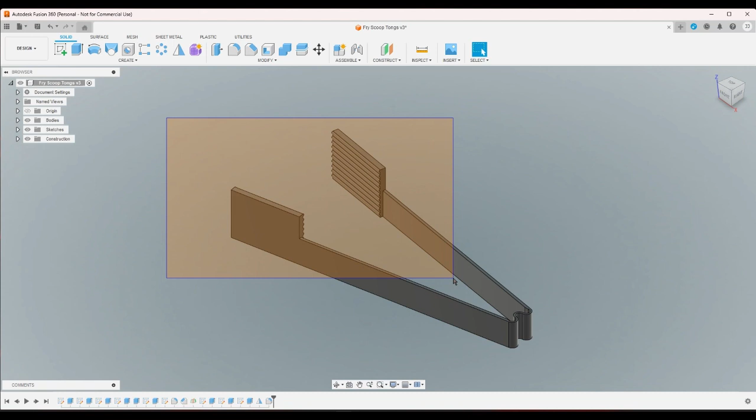I printed out the tongs here. This much was good. This much was not, but the important part was this much, because I wanted to know how well this joint worked. But I did need to know how well these would work, and they didn't work all too well because they aren't stiff enough.

So I'm going to go ahead and go back on certain things so that I can change things.

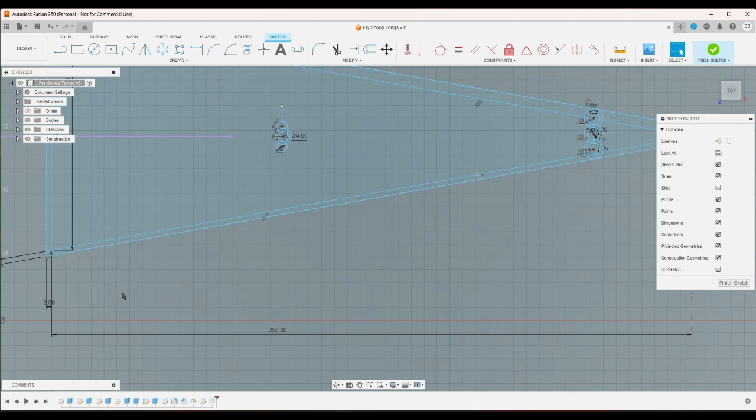What's going on? So to make it stiffer, I was afraid of that. To make it stiffer,

I see, it's because these are the same. I'm going to go ahead and delete this. Oh yeah, delete. Now I should be able to make this 4.

Okay, that still wants to be driven. Now can I... that still wants to be driven. That can be bigger. What's driving this?

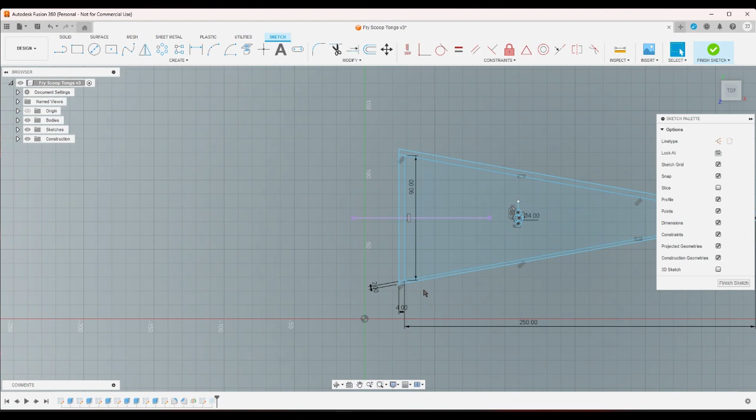Oh. There, okay. So that'll make it stiffer.

And now I'm going to go ahead and... these should be this point right there, and that point right there should be, or that line should be coincident.

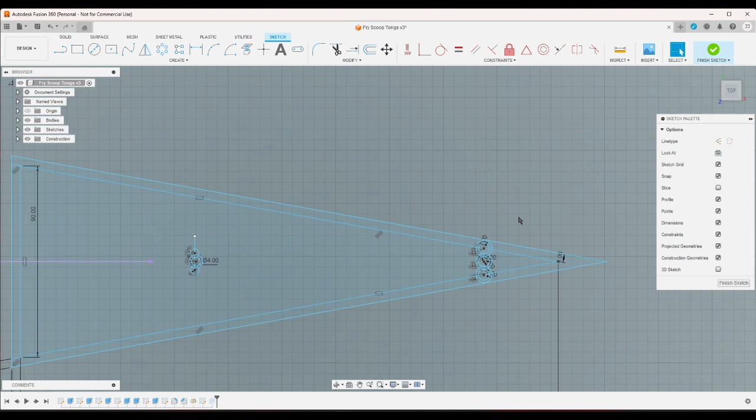And then I want to move this. Yeah, I'm going to change these to actually 1.6. What? Can I not do that? No, it's because numlock keeps getting turned off for some reason.

There, and then I'm going to go ahead and put these back where they're supposed to go. That fully constrained it, so that's good.

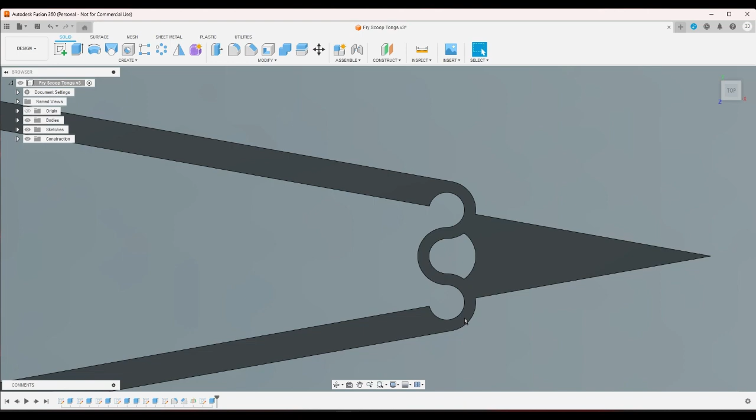There, oh wait. Okay. So that'll make these stiffer, but I won't quite make them stiff enough. At least I don't think it will.

So then what is the angle there? That's 0. That's good, I want it to be 90. Wait, that's wrong.

What kind of planes can I make? At angle, tangent plane, mid-plane, plane through 2 edges, plane through 3 points, plane tangent to face at point, plane along path, axis through cylinder, axis, axis, axis, axis.

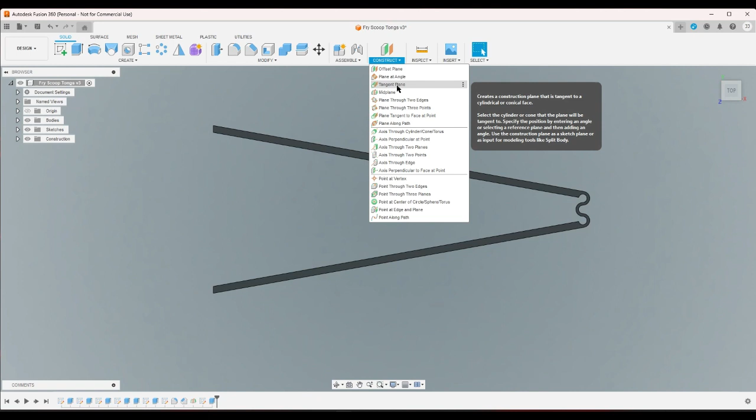Okay. Point along path, point at vertex. Okay, there we go. That's normal to that, so I should be able to... there we go.

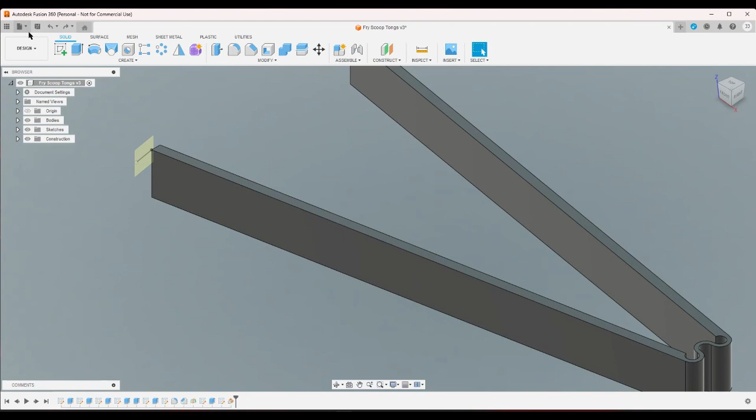Wrong plane. Okay. And then

Make that, I don't know, 2. Actually, no. Do it like that, and then make these equal.

And then from whatever, I'll go up this way then. Hmm. 2.5.

Now I should be able to extrude this way. Can I go to a line?

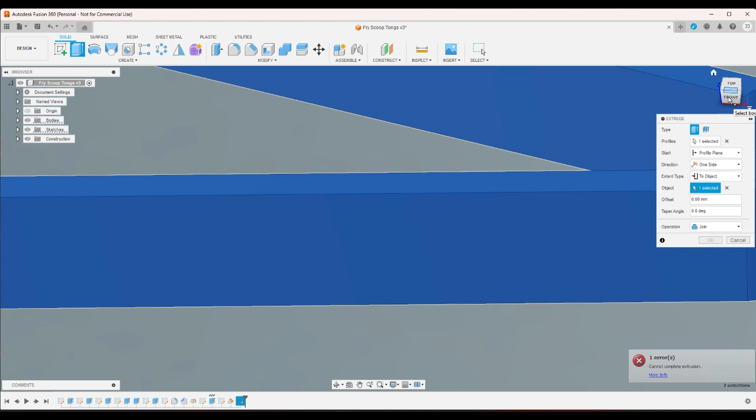I want it to be a line. Can I go to the point? Nope. Oh, extent to object. No. Okay, try again. This.

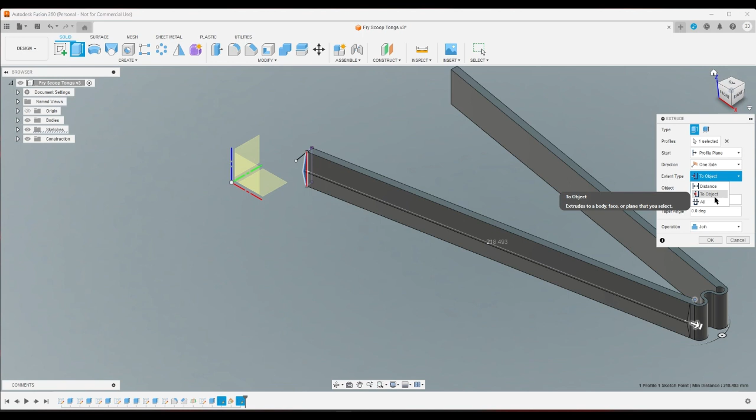And what is that distance? Can I chamfer this? Kinda.

There. Now that, the chamfer can't go all the way to the whole thing. Why did that say 2.4? Okay then, that's weird.

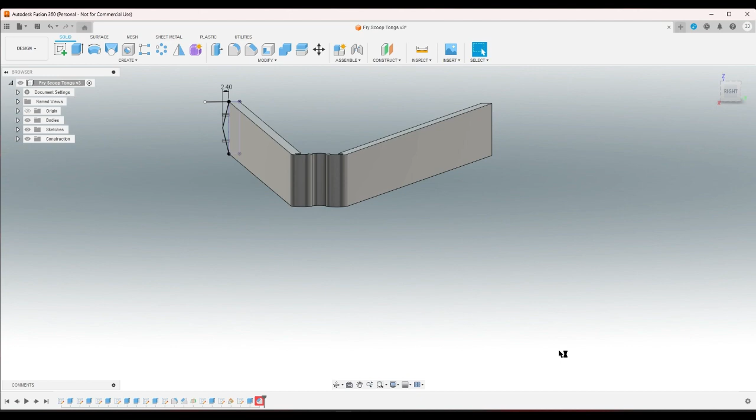Now I should be able to take this plane and mirror these two features.

Error. Compute failed, cannot find edge to chamfer. I'll just do the chamfer by hand, I guess.

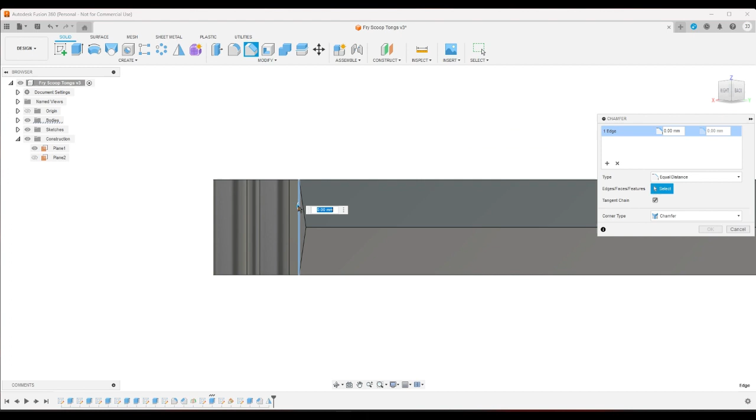There, that I believe should keep it from doing much.

I'm gonna go, not this one. I'm gonna go back into the sketch. No, that was for the plane. This sketch.

I'm gonna go ahead and do this. Should have done this anyways. That would have been easier.

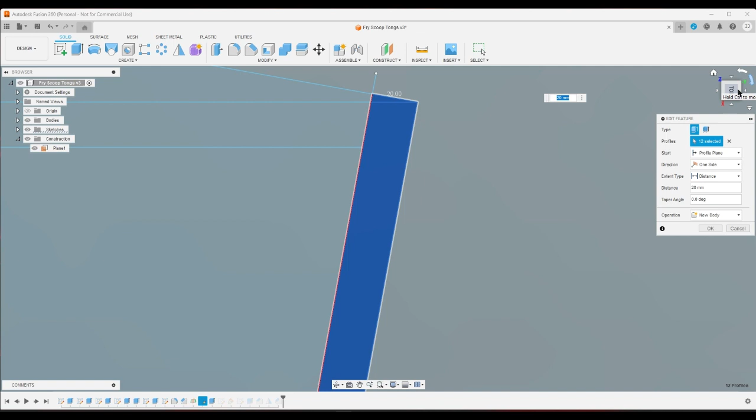And then it was this extrude, and then it was... see, then I wouldn't have had to have made a whole separate plane.

Yeah, I can just... okay. Options. Okay.

Get rid of the sketches. And, cool, cool.

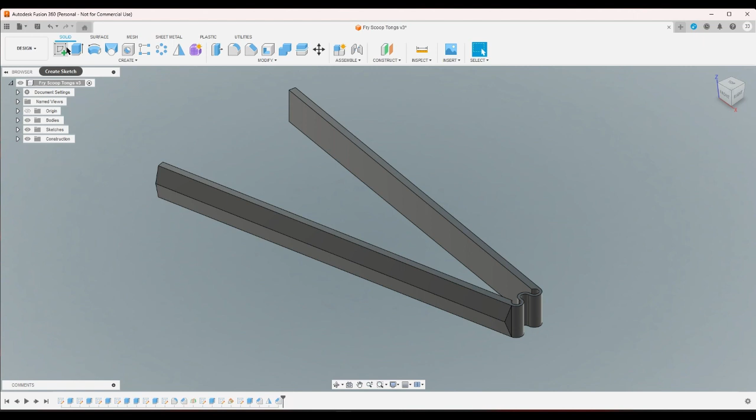So now what I'm going to do, to try and make these into better tongs, so I'm going to make a sketch here. I'm going to go ahead and project these here faces of these triangle bits.

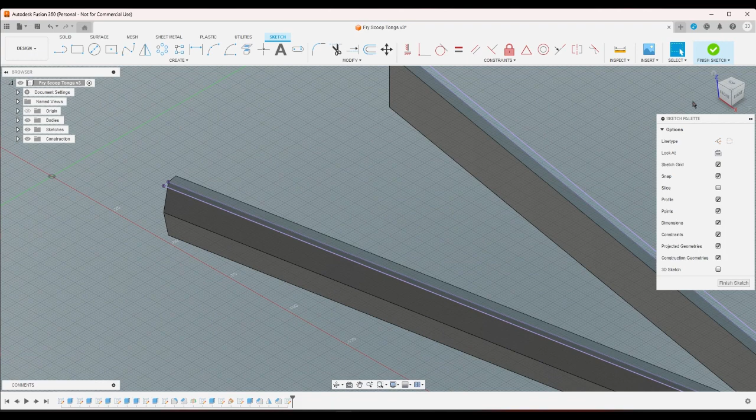Alright, so the thickness and that triangular part should keep it from being flexible. Now this part is gonna make it better able to grab things. So I'm just gonna go ahead and eyeball something.

Put a line between these two lines and then a line starting at the midpoint going this way. And these two are construction lines.

So now if I mirror this line across this line, then I go ahead and I offset this by about minus 2.4.

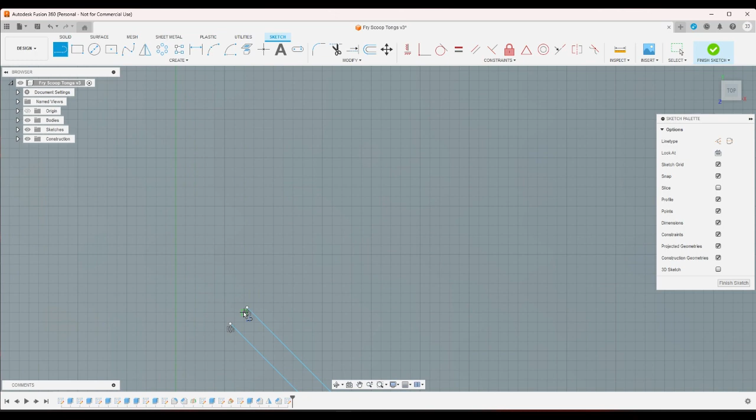And then I mirror that one. Then if I connect these, does that close it? That closed it? Yeah, it closed it, okay. No, it didn't close this one.

Oh no, it didn't close either of them. And this one's still not closed, is it? Hang on, where is it? No, it's closed. Okay.

And then, if I close that all the way, how much space will I have? I'll have... this will be to here. No, that's wrong.

Too many control Y's there. I had to control Z them back.

You know what I'm gonna do? I'm gonna try something. I don't know why, but that just felt right. And then why is that mirror? This was mirrored, but it's different. Whatever. Okay, if I take this...

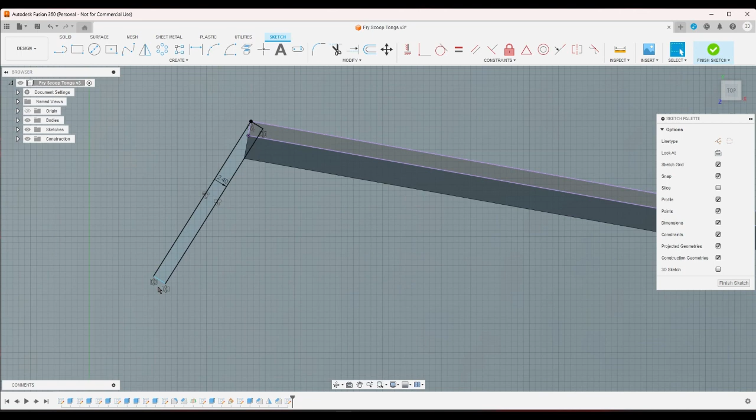So if I go ahead and shrink it some, then I get 28 times 2, would be a little less than 60. It'd be 56. Still not much, but much better than 50 actually.

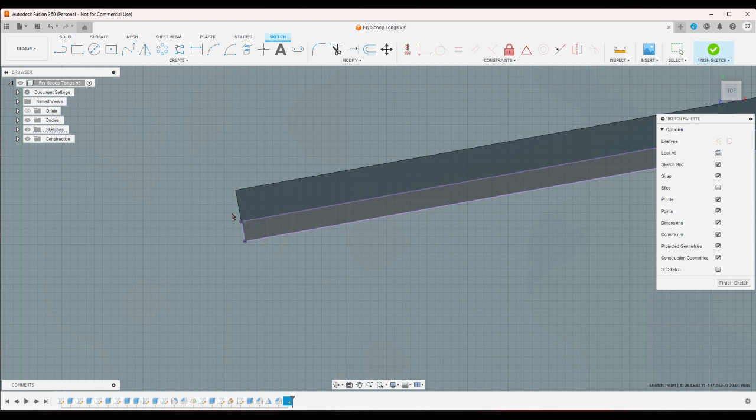So make that 28. And this didn't mirror. Why didn't it mirror? This should be... what happened? Where'd it go?

Failed to solve. Okay, well then I'll just delete it. I'll just delete that.

Now what I'm gonna do is I want to make this into something that can pick up fries, right, and a good chunk of fries. So then I'm gonna bring up the scoop here.

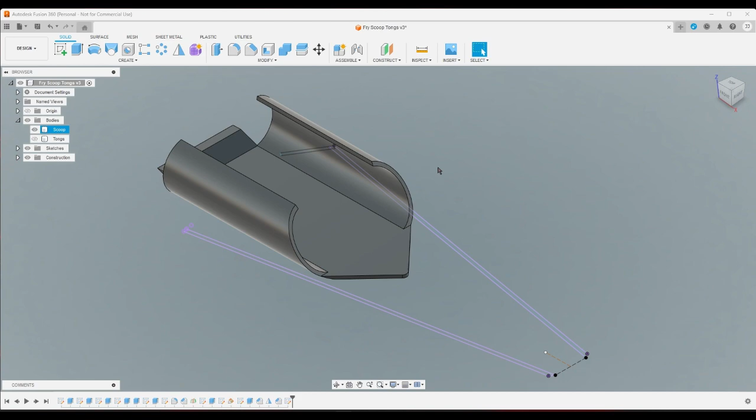And I believe it was the very first sketch, yeah. So the outside is 32, right? So now I'm gonna take and make a line going this way and make it 32.

If I put a 3-point arc here... no, not there, on the line, okay, that's interesting. If I put the arc like here, that looks nicer, but that's not gonna be nicer.

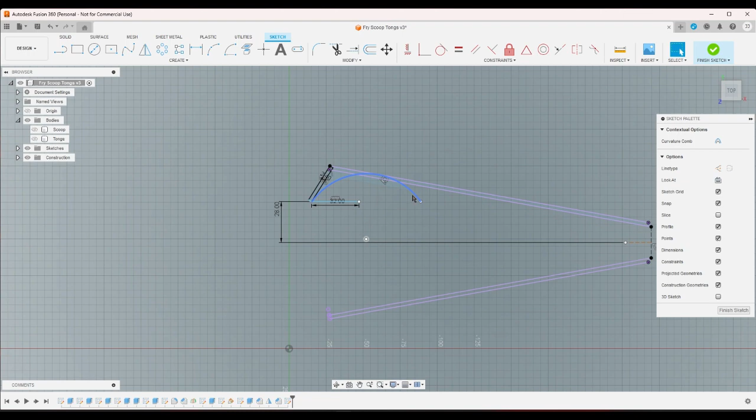Let's see what happens if I try and make a circle all the way out to here, and then make another circle out to here. And what is that distance? 2.867. Interesting.

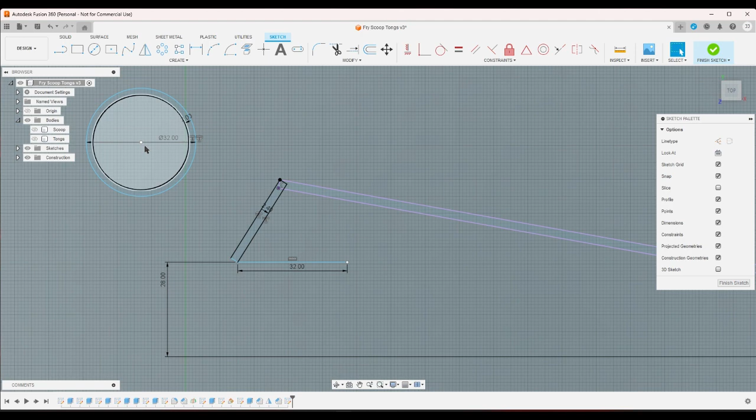Again, I want to make something that looks like it should be able to pick up French fries. That should be a negative. And if I put that there...

What if I just put a line here, put another line here, and call it quits for that, or call it good enough for now. I'm gonna make these construction real quick before I move them around.

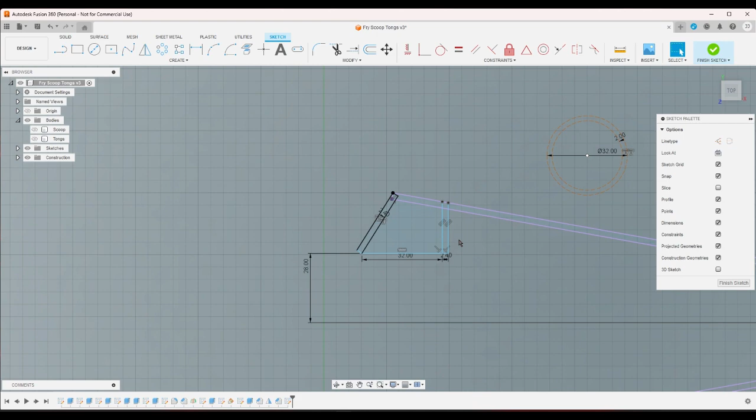I chose 2.4 here because that's a little thicker than 2, and it'll make it a little stiffer and a little stronger. That's a construction line.

I think... oops. I think... yeah, that's weird, okay. I think I should put a line here and define its distance from that line there. Call it 5 for now.

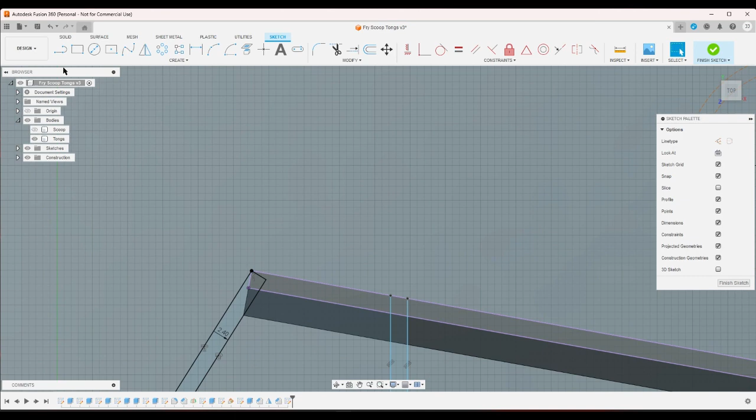I'm going to go ahead and go back in the sketch and put a line from here going out this way. Now I'm going to extrude this and the other one, to here.

Now if I take and mirror that... I'm gonna move this and create a copy. Okay, now I'm gonna move Tongs 1. No, now I'm gonna make an axis.

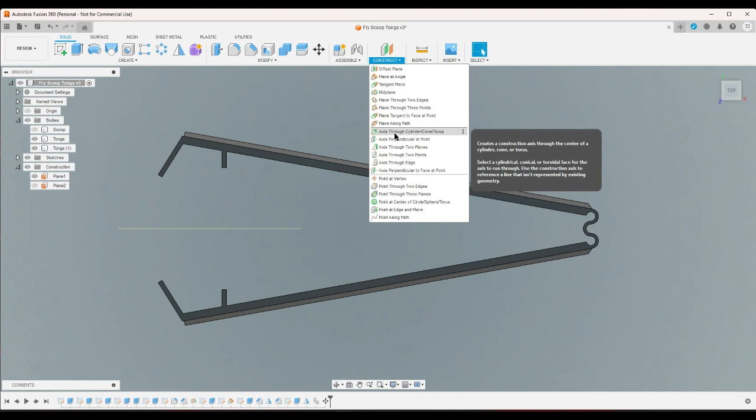Going through this here. And I need to see something. I'm gonna move this one, rotate it, and choose this axis. I'm gonna... okay.

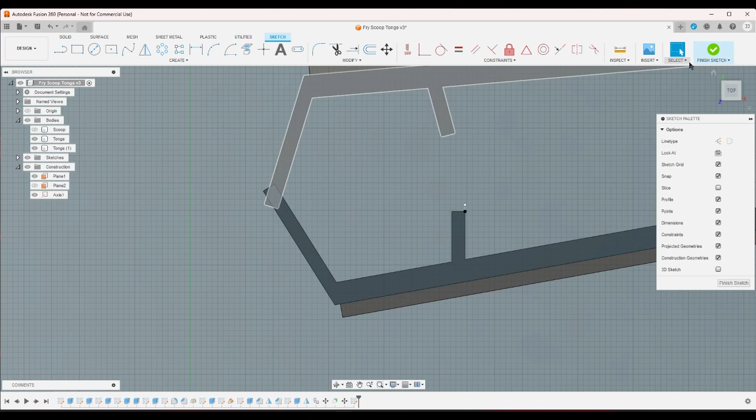Now I'm gonna start a sketch on this one and make a line that roughly goes to here, and that is 13. What did that need to be? On the scoop, it's... I don't need to actually have the scoop visible. On the scoop, it is 53. That is the thing.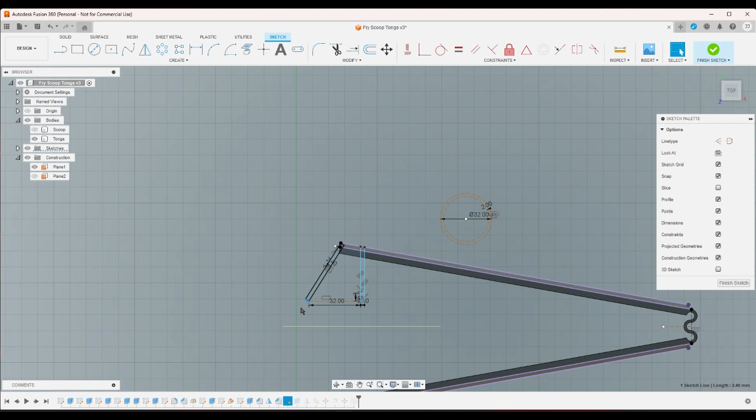Right? Because in order to make it 53, I'm gonna have to do this, right? And then it's gonna close less. So if I take this now, what is that? That's only 20. That gives me 40.

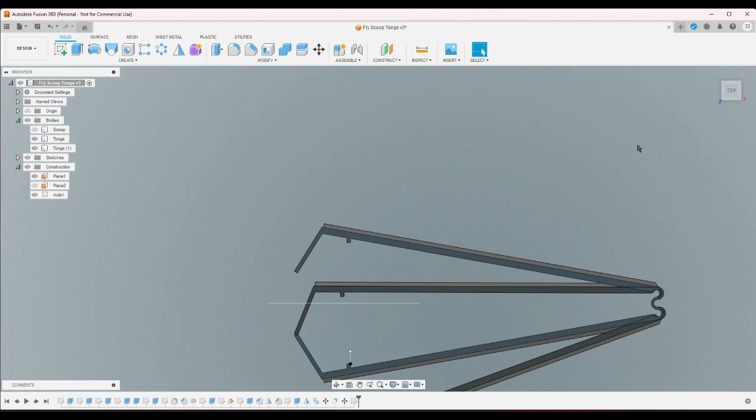Right? And then I can go back into here and change this to about 20. Yeah. And that's an issue. It's especially an issue because this is not much space.

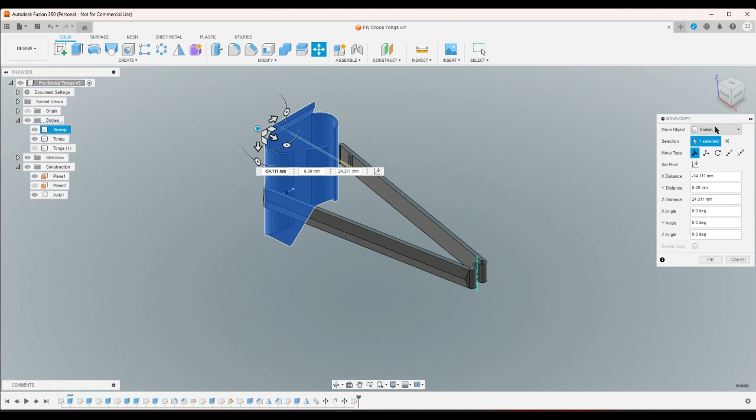I want to see something. If I move this like this, put it here, it fits inside of this.

So instead, I'm going to go ahead and take and delete this. Yeah, go ahead, delete this. Create a new sketch here.

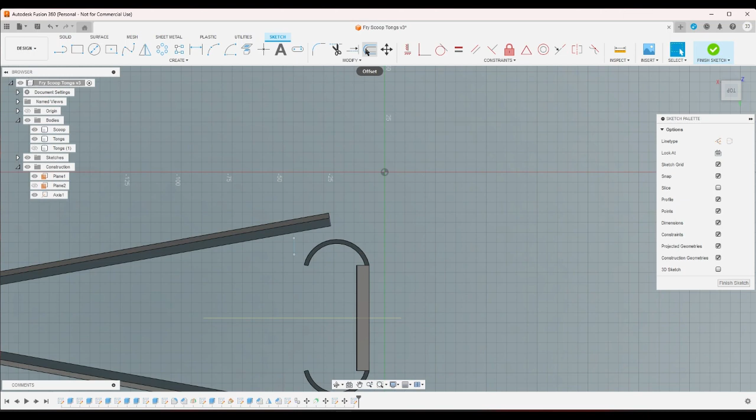And then project these bits, and then project this bit, and this. Then I'm going to go ahead and, no, not tongs, scoop. Put a line here to here, then halfway.

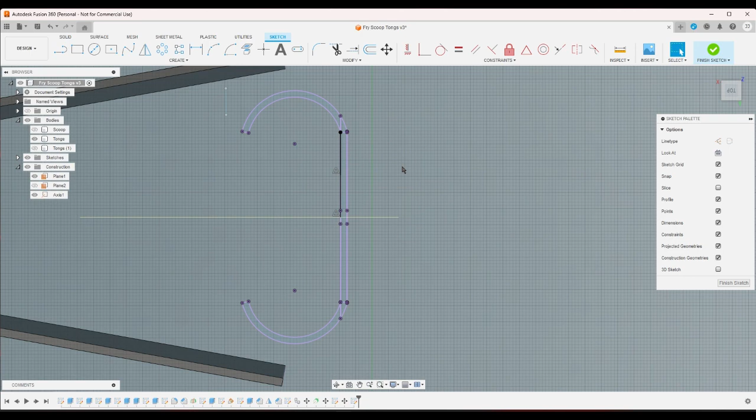Copy it. Move it, like 15 degrees.

What did that change about the actual relationship that these have? Oh, I see, I see. This is a point on the thing. That's wrong.

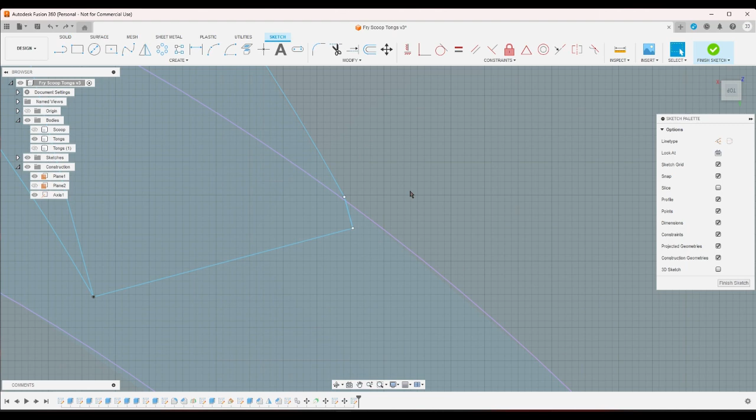Okay, paste it again, move it by about 15-20 degrees. Completely decouple this from the other thing. Put it inside a little bit, maybe a lot.

Okay, now I'm going to go ahead and measure this line I made. 13. Okay.

And then if I take the distance from here to here, I'm going to get 25, which is going to give me 50.

Okay, so now I'm going to go ahead and extrude all this stuff.

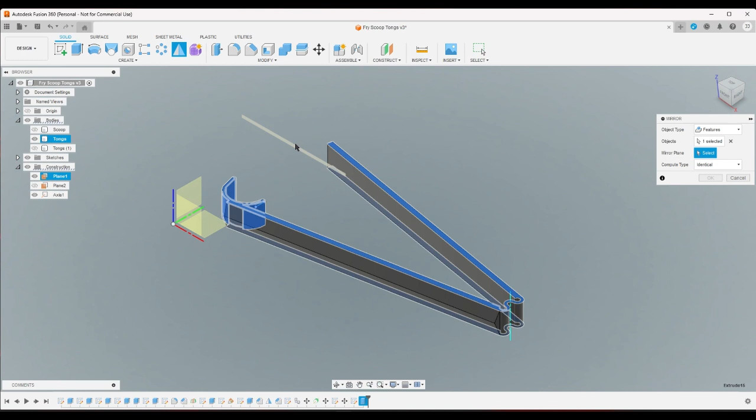Now if I bring out this, it doesn't have that anymore because... yeah, so I'm just going to go ahead and delete that. And then I'm going to go ahead and copy it again.

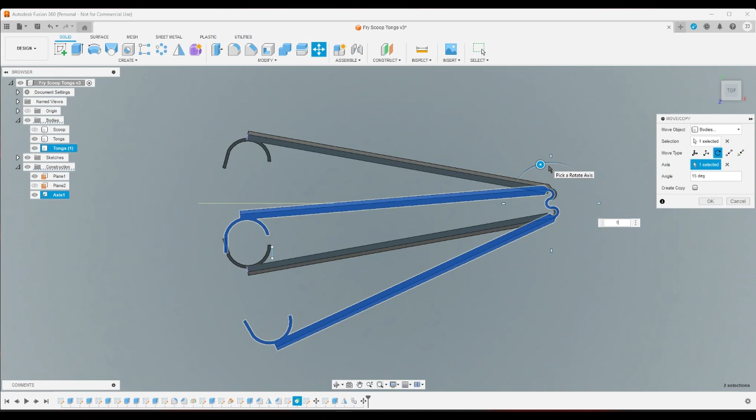And that's what it would look like. And now if I go into this sketch... sorry, don't undo that. So I make a new sketch here, and I need to measure what this is.

15. So I go back into this sketch, and instead of being 13, I make it somewhere between 13 and 26. I'll just make it 3/4, so 13 plus 26 divided by 2.

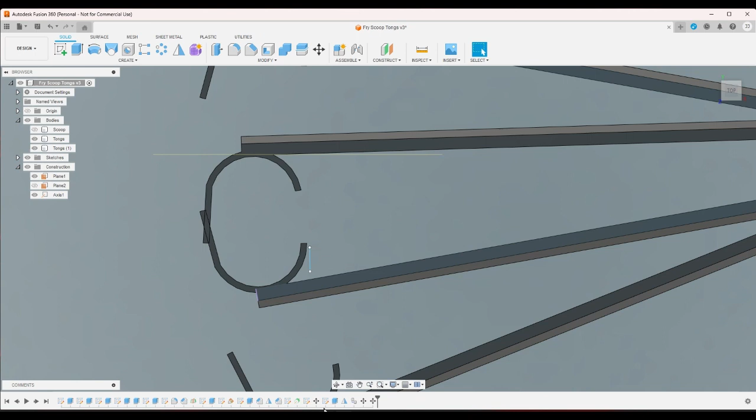And then... create a sketch here and measure this distance. 30.

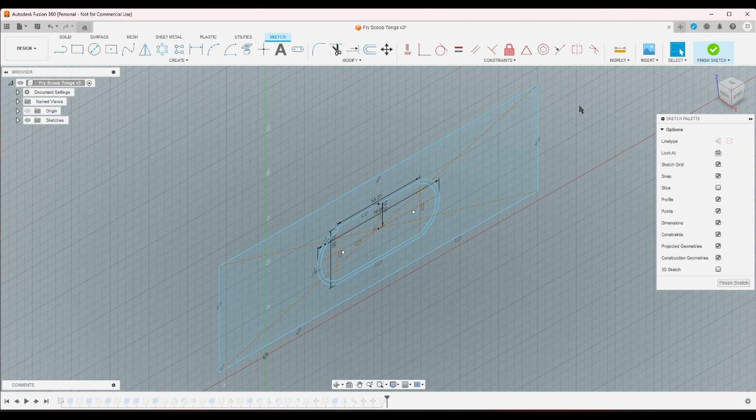And then what was it on the actual scoop? 53. So that's about a little less than 3/4.

And then I get rid of this one, and then I measure this again. 37. Okay, 37 is not much.

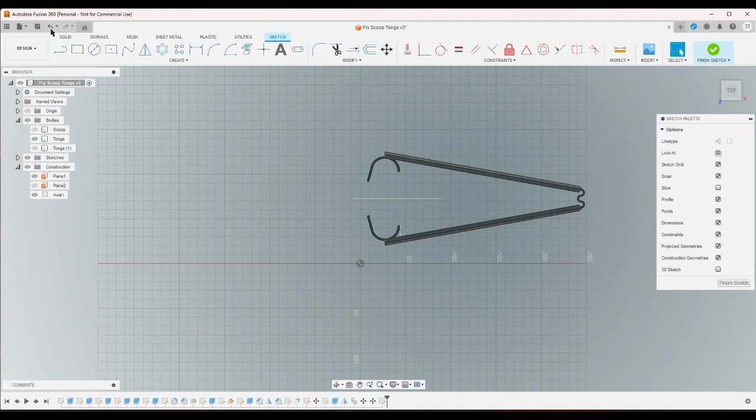Nineteen and a half. And then...

Now what is that? 44. Better, I think that's good. I think that's good enough, kind of.

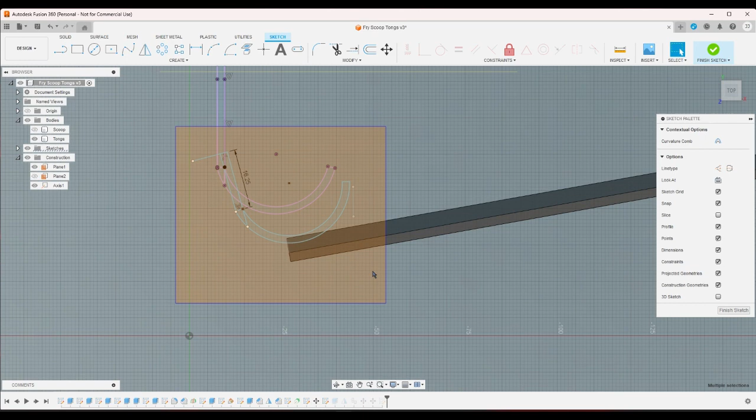But another thing I can do is move this further out, like that.

And what that'll do, so that'll give me more space here, hopefully. The issue is the more space I put here, the more space I need here.

Right? This needs to fit inside of the fry baskets. So that becomes an issue.

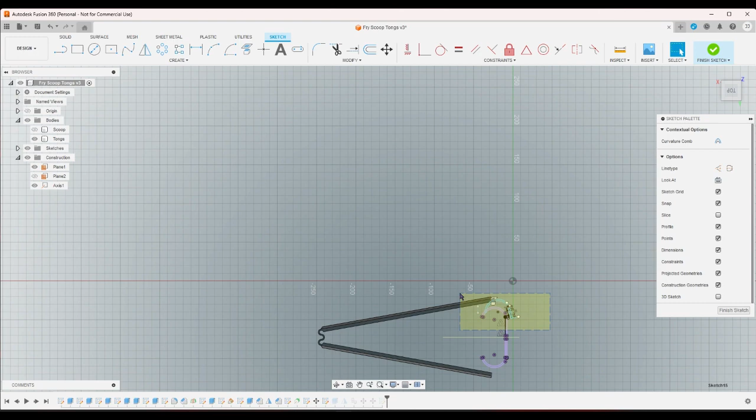So I really don't want to have to move it all that much. I'd prefer to keep it in like this if I could, but then that reduces this.

Another thing I can do is I can reduce this slightly. But that doesn't do much.

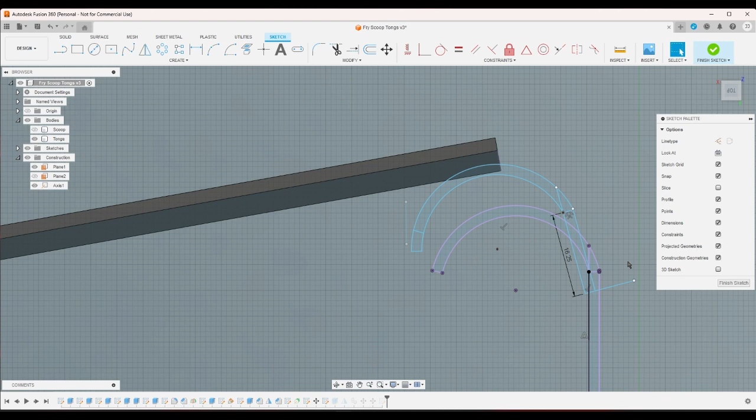I think I'm going to try it out like this. Where is that? That would be this one? Yeah, okay.

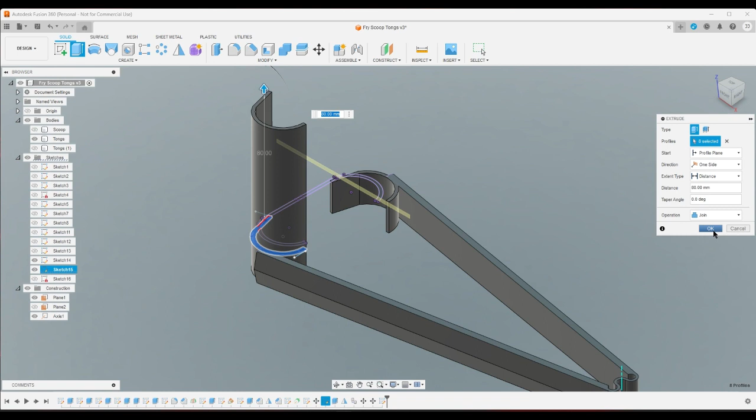Pretty darn big, but not too big. And then mirror that again.

And the scoop was... where's the move for the scoop? Okay.

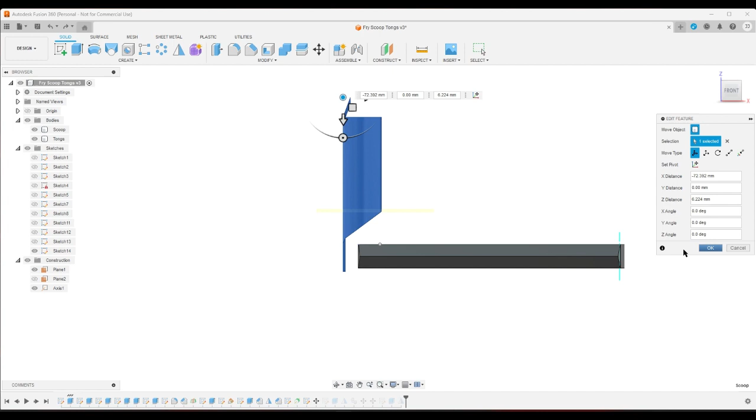This is just to test it. So the idea here is I'll print it in this orientation. I would use it actually in like this orientation.

I'll start a sketch in the mid plane and put a line about there-ish, and another line here.

I'll bring up the scoop. Okay, bring it down so that this... okay.

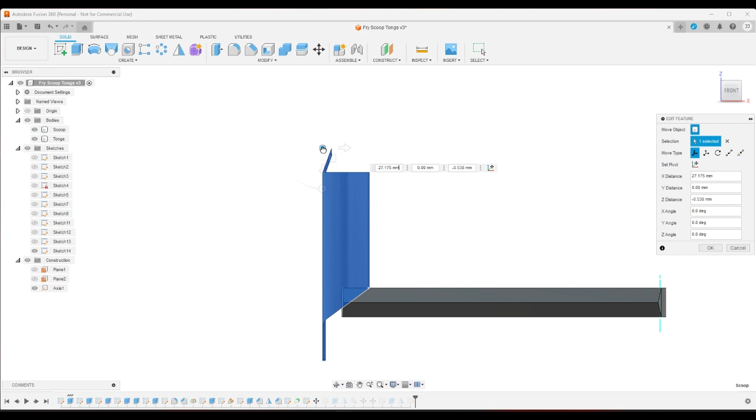So now change this extrude to be more close to that. Okay. There we go.

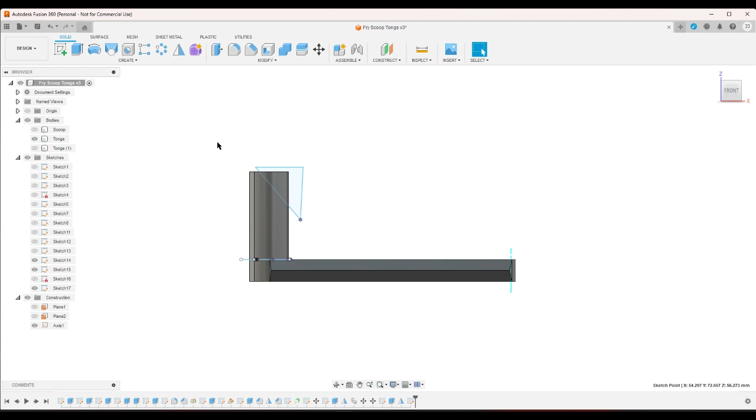And then change this symmetric and that.

And then this should be about 45 degrees, I believe. I'll make it 40.

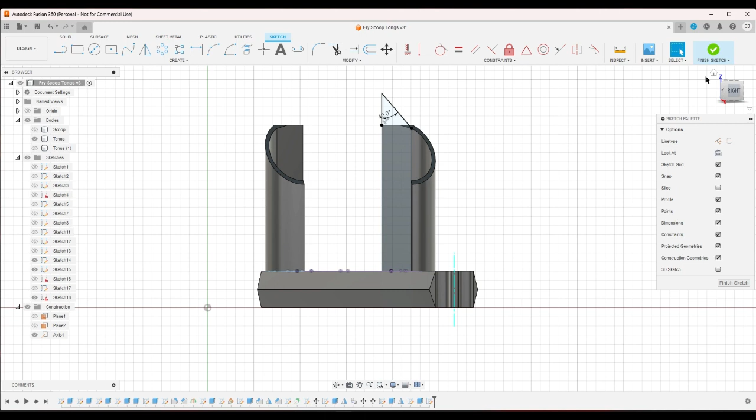Put it here. It's this one. Mirror this on this plane.

And then if I take this sketch here, that's 59.

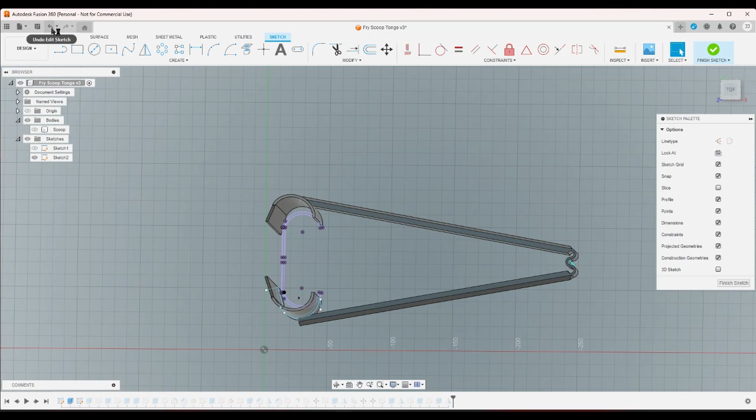So that's... ooh, that's correct. Okay, delete that.

What if I make it actually 59? Yeah, that's much. 40, and then, yeah, I'm just eyeballing this.

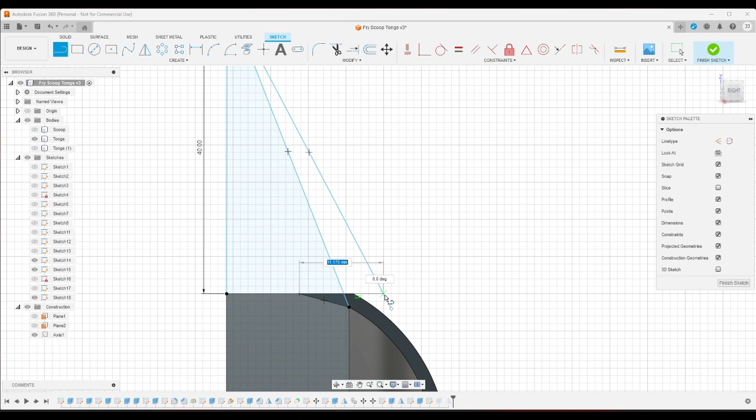Can I move? Yeah, I want to move. Can I move this to before this? Not easily. So I'll just delete it.

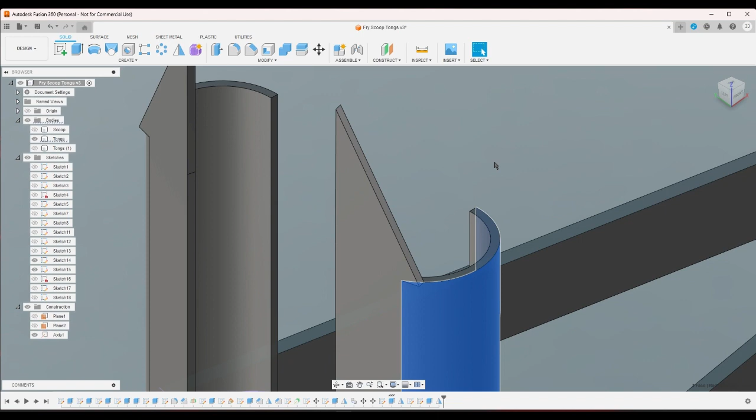Okay, I want to clean this up. I'm going to go ahead and project this face and the other face on the other side.

Okay, I'm going to go ahead and cut these out. And then I'm going to go ahead and put a sketch here.

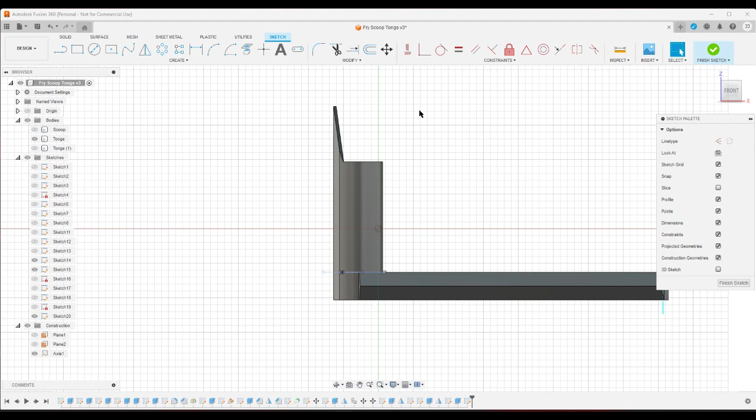Okay, now if I go ahead and extrude this symmetric. Yeah, that looks good.

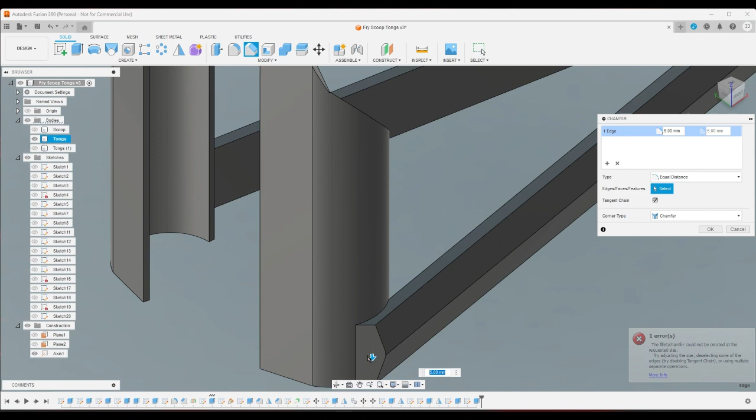And then these sketches are annoying. And then I'm going to go ahead and see about trying to chamfer this. 5. Okay, and what that did is that just made it a little bit better connected there.

Now I can select this again. Now I can make it 5. Okay.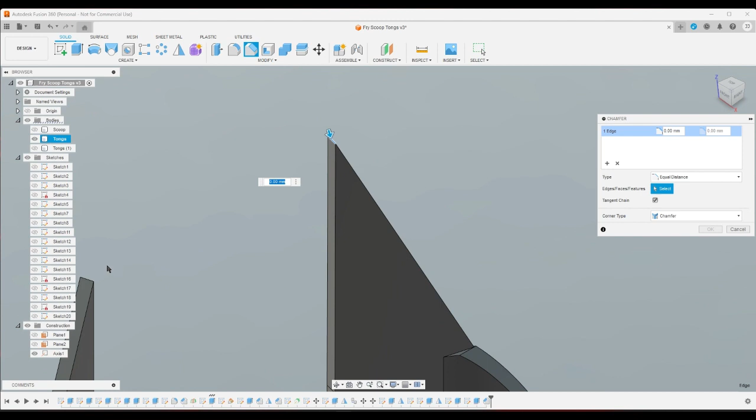This is gonna be so stupid. Okay, chamfer these. The reason I'm going to fillet these, no, chamfer them, the reason I'm going to do that is so that these don't go down into infinitely small points.

How about distance and angle? Yeah, that's good. Change that angle to...

Where was that? It was before the mirror. Okay, what is that angle? 27.5. Okay.

That, nope, okay. Darn, this is going to be some kind of cotangent relationship.

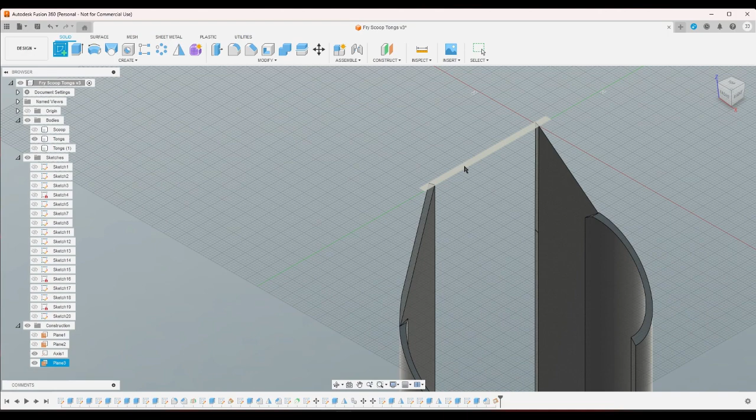Screw it. Three-point plane, here, here, here. Big old rectangle. And cut it out. There.

Okay, so now when I close that, I'm going to delete these again. Never mind. So now when I close that, it'll be able to hopefully hold French fries. Oh, you know what? I just realized if I'm going to do it like that, I don't know why these are too... I should do that.

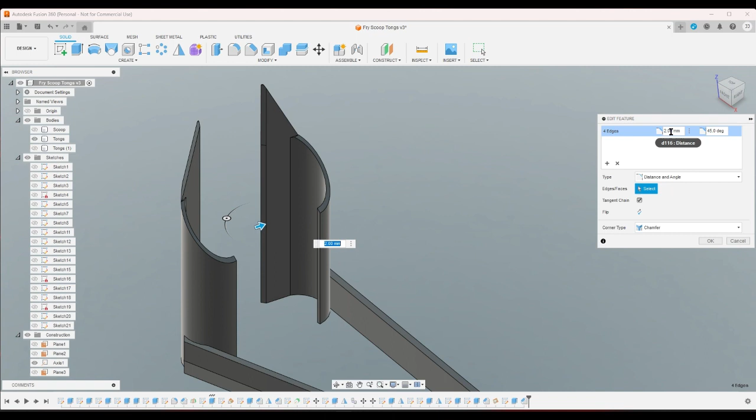1.4. And what that'll do is give me something to, like, an angle is better to scoop with than just a piece of flat.

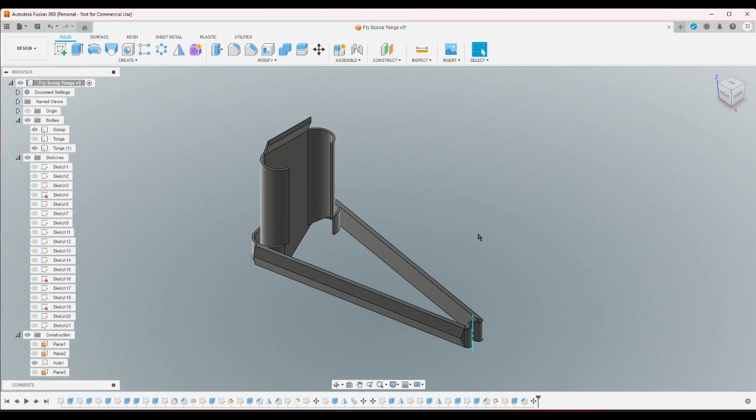And if this works, this isn't the end. I want to figure out a good angle to have these tongs at in relation to the scoop part.

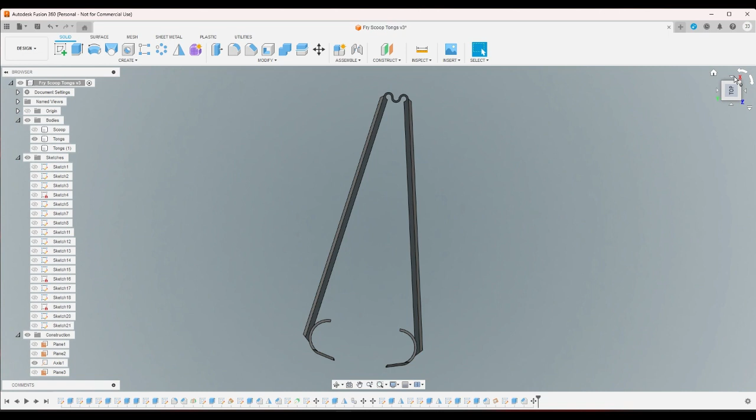So after this, I'll break this up into different pieces and put probably just a slot on here to slip these tongs into, because I want to figure out the best angle. Going at it like this seems uncomfortable, especially because the tongs are kind of at the top of the thing, you know.

But this will work for now. I'm gonna go ahead and actually rename this to Tongs with scoop. And I'm gonna go ahead and save this.

1082 is not too many. Alright, and now I'll see how well this works. I hope this works at all, because, to be honest, I'm not even done with the stiffness here. I'm skipping from testing the stiffness of these tongs to this whole system.

But I don't know, maybe it'll work. We'll see.

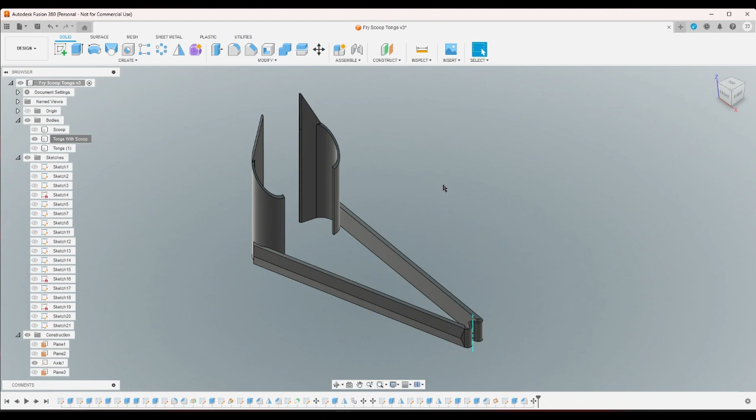Alright. I've got the thing here. Hi, Chia. And then yeah.

So it's really heavy on the end, it's funny. It wiggles a lot.

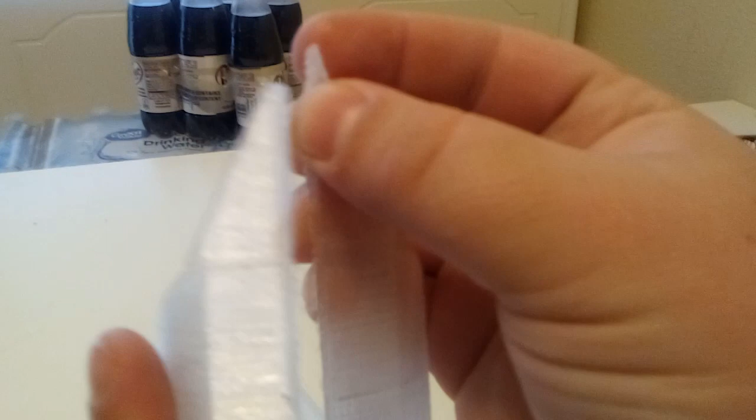The shape here, this triangular shape, didn't turn out too well. It broke off, like right when I pulled it off of the printer, and then it broke off on both ends, so on both sides. So I'm gonna change that to be a half circle shape instead of a triangle. But other than that, it came out as expected.

The triangular shape here increased the stiffness enough that it takes quite a bit of force, not that much, but still enough, to bend it. So that's good.

So yeah, of course, it's funny. It's funny. It jiggles.

Anyways, so now I'm gonna test it on this basket of fries. I noticed that this one fits inside of a smaller cup than the other ones do, which is kind of nice.

What's this? Yeah, so now I'm just gonna see if I can grab the fries, and if I can grab the fries and this works, then I can move on to other stuff. Depth perception is difficult through a phone camera.

Did this break again? Yeah, whatever. Yes, it broke again, didn't it? Half circle it is.

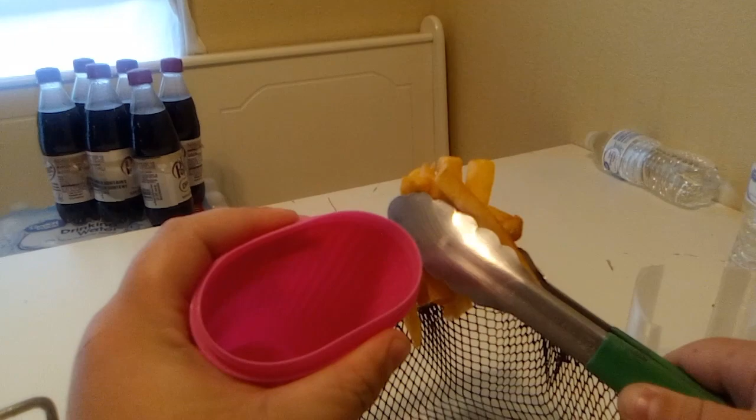Well, these can grab a lot of these fries because these fries are thick. But when you grab a lot of fries with the tongs, they get all bunched up and difficult to fit into the fry cups because the fry cup openings are about that big, and then it's hard to fit them in, you know.

So if I try something, if I try to scoop these on both ends here, and then I put it in, right? I liked how I was able to put it in the cup fairly easily.

What I didn't like is how difficult it is to grab these, and part of that is that the shape of the basket is not very conducive to this. I think if I had actually...

A rounded edge, it's so hard to get things to focus with this stupid phone. It's changing the light balance, which is dumb. But if I had a rounded edge there instead of a pointed edge, I think it would glide along the basket more easily, right?

Another thing I can try is just trying to scoop it, like this. And again, it's grabbing them on the side like a regular pair of tongs would. So I'm not too keen on that. I don't know what I can do about that.

These two French fries right here. Grab them, put them in. See, that right there, that's the goal. The angle here, the 90-degree angle, is really awkward and annoying, but it's not that bad. Is there another fry in there?

It's not that bad. But yeah, the tong parts, the fixes to the tongs actually worked fairly well. I can actually pick up this whole water bottle, and I don't know if that's helped by the shape of this end here, but yeah.

So I think what I'm gonna do is I'm gonna make the tongs wider to begin with, because I'm gonna shift from going this way to going this way. I'm gonna make them shorter. And then another thing is I need to hold them like this. I keep wanting to hold them like this for some reason. I should hold them like this.

So I can do two things. I can either move this downward point down here. What was the other thing I could do? Or I could... what was the other thing? Okay, you know what? I'll just move this downward point down to the bottom here.